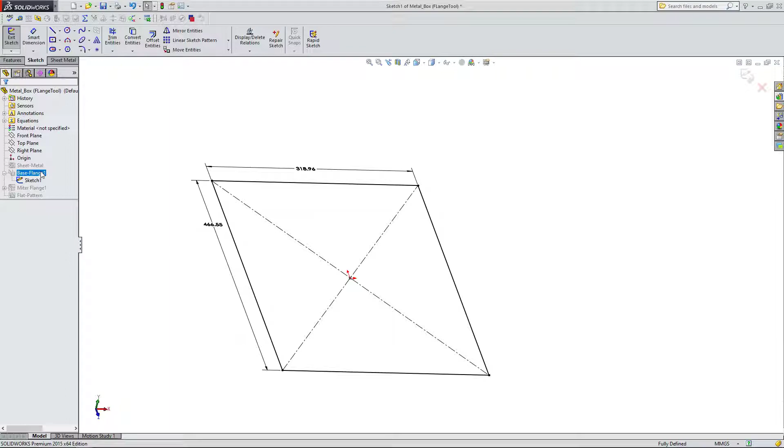Those edits include changing the sketch of the base flange. These are the dimensions I'm using. It doesn't have to be exact, it's really just a baseline measurement for the sizing.

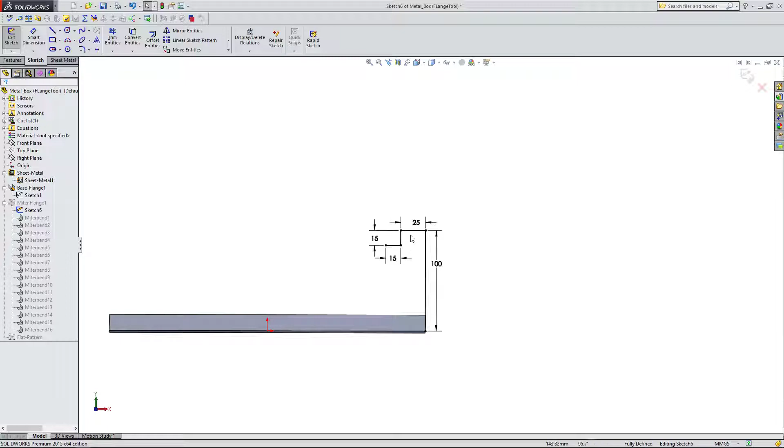The miter flange has also changed. If I go to the sketch of the miter flange, you'll see I've made it 100 high, 25 over, 15 and 15. And that sketch, as I mentioned in a previous video, is on this face.

Other additions I've made: if I go to the sheet metal parameters, I've changed my radius to be 1 millimeter and the thickness to be 2 millimeters. It's really just a theoretical dimension.

In real life, you have to go to your bend tables to get the correct estimates, but I just have this as a reference for now.

Just for this example, I set the radius to 1, and this is going to be 2 for the thickness. We're not going to be using a bend table in this example, so this gauge table is not going to be selected.

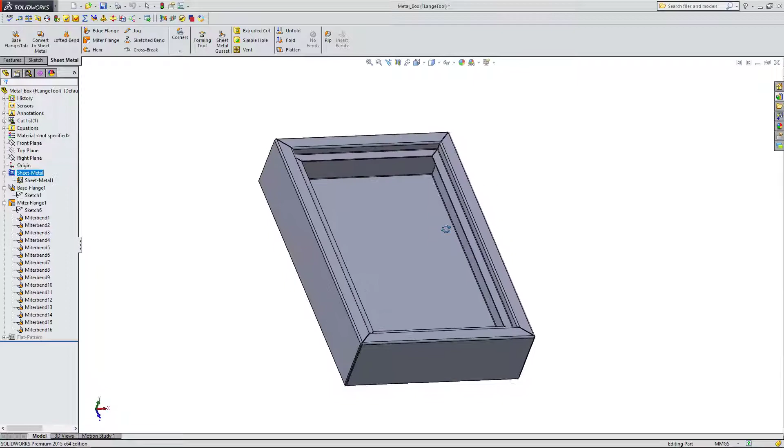From here, what we want to do in the creation of the box is create a hole or two for our exit cables, and also create a hole for the hinge.

To do that, I'm going to simply create a sketch. The miters themselves can't really be altered the way that an edge flange is altered.

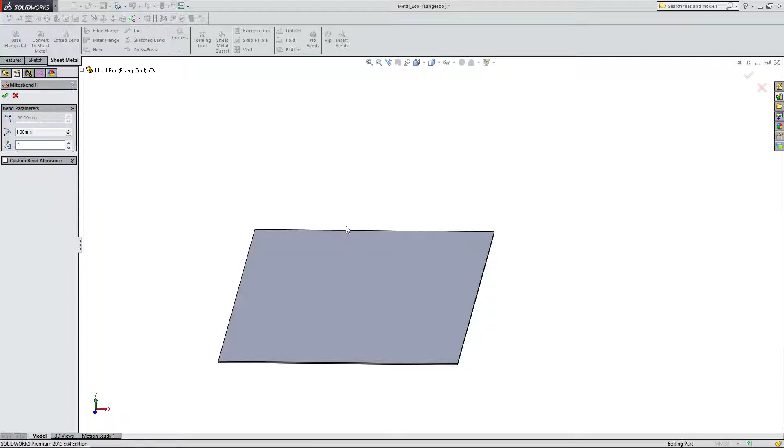So I'm just going to create a sketch on this face, and I'm going to create a few circles for the bottom.

I'm going to select the center point of the circle and the origin, and make them vertical with each other. I'm also going to make the 3 center points of the circles horizontal.

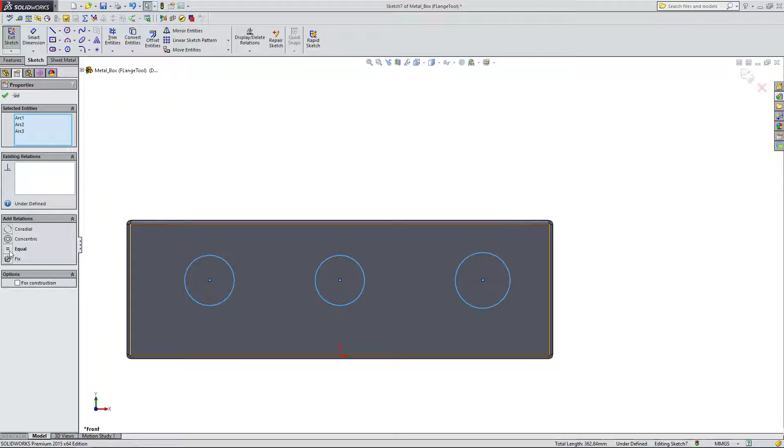I'm also going to select the 3 circles and make them all equal, which will make all the diameters the same.

So this is basically the result you should have, and you can see that the circles can slide, they all move together. I can set a dimension between these two, and I'll make it, let's say, 75.

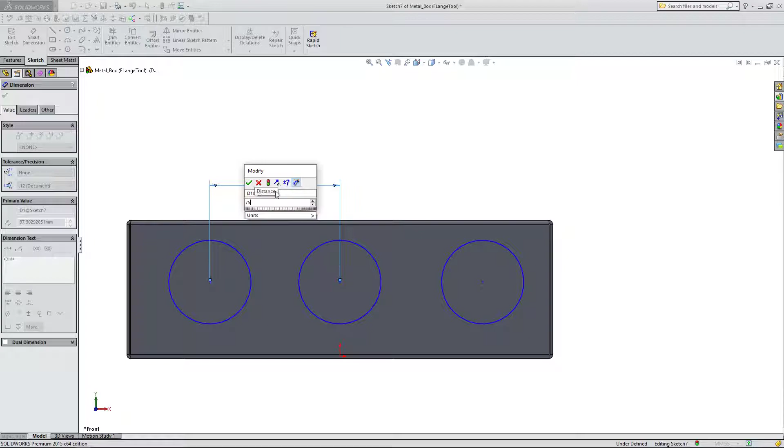I'm going to set the same dimension for these 2 circles between the center here and the ends, and I'll click here to make it 75 millimeters. And for the diameter, I'm going to set this to be, let's say, 40, right here, 40 millimeters.

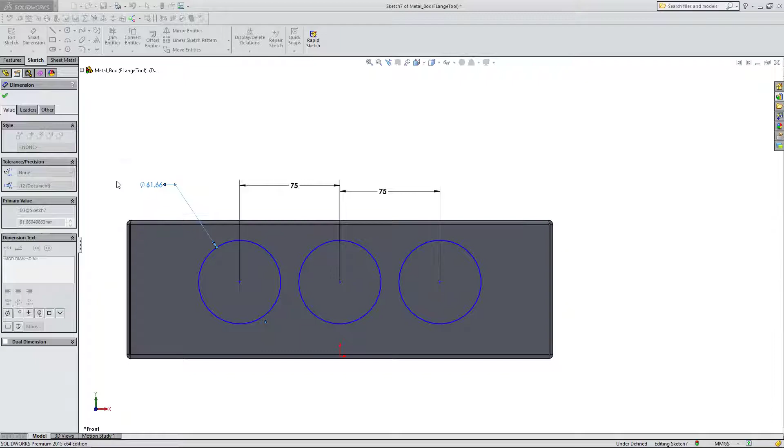From here, we're almost done. We just need to constrain it in this direction. So I'm going to set a dimension again from the origin, and that's going to be 40 millimeters.

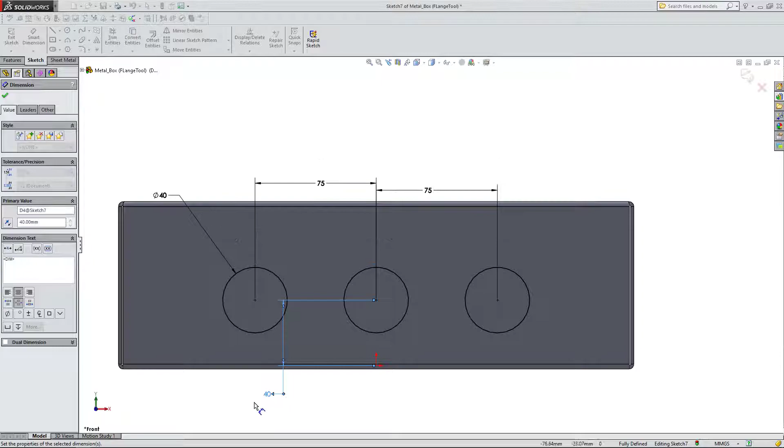If I'd like, instead of taking it from the origin, I could actually take it from the base of the part. So I can click on the bottom line, convert the entities, and create a smart dimension here. If any of this is new to you, I definitely recommend looking at a beginner's tutorial in Solidworks.

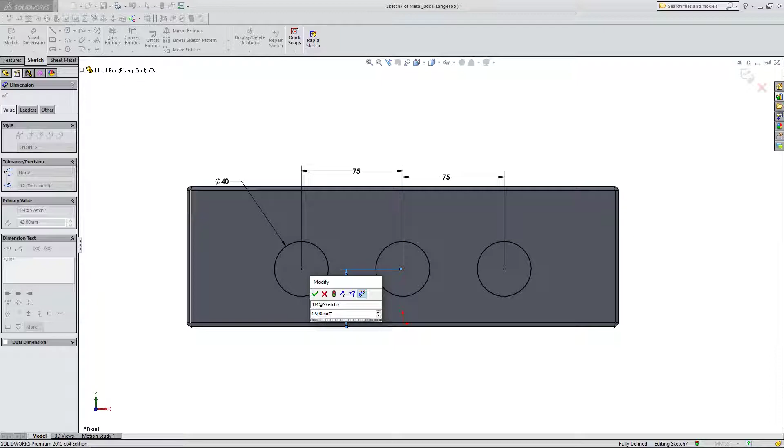I have some good Solidworks tutorial videos, or if you want to look at someone else's tutorials, just to understand basic sketching rules. If you want to check out my video, look at part 3 of the beginner training series, where we go over sketching.

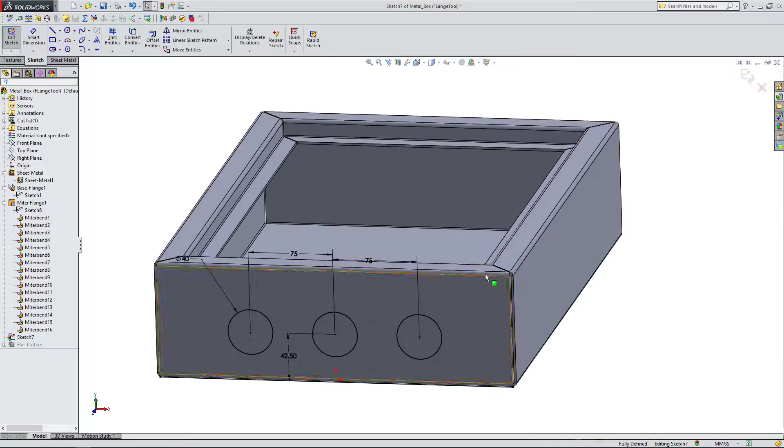So we're here with our 3 circles. I can go to my sheet metal tab and create a cut, an extruded cut here. So I'm going to click on extruded cut and select my 3 circles.

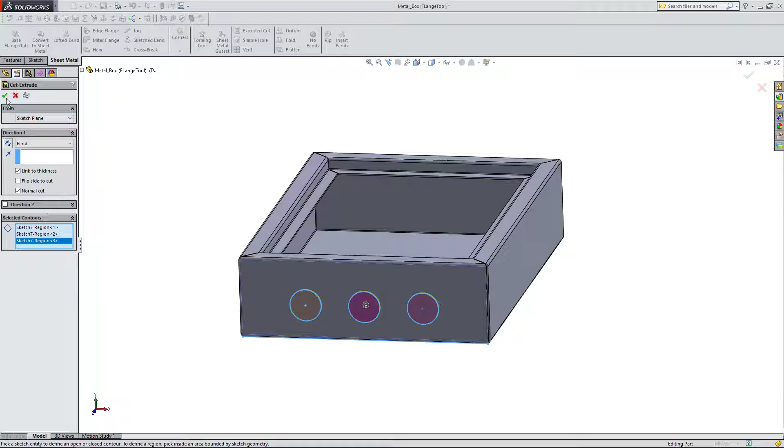I'm going to come up here and click on link to thickness, right here. When I click on link to thickness, it's going to automatically link the value of the thickness of the sheet metal to this cut. So I'm going to hit OK, and you'll see that the 3 holes have been created.

Now we want to create 2 more holes here for the hinge. So I'm just going to come up here and save this first. I'm going to start a sketch on the front plane.

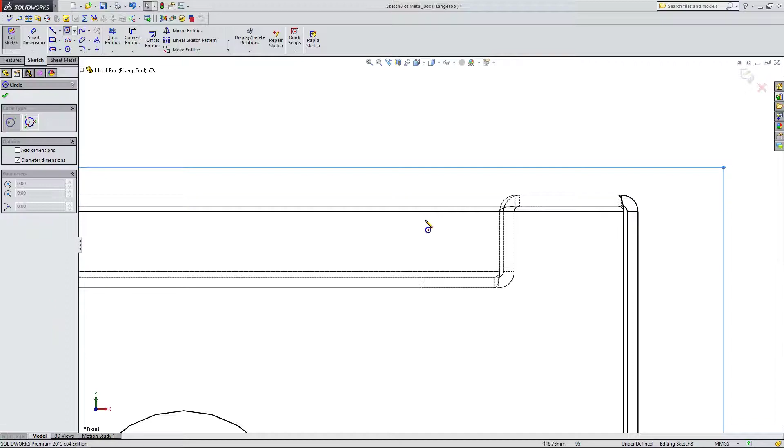I'm going to go to the top, display style, and make it wireframe so I can see through the part. Now I can create a circle and lay it about here. You can see that it's in line with this wall right here.

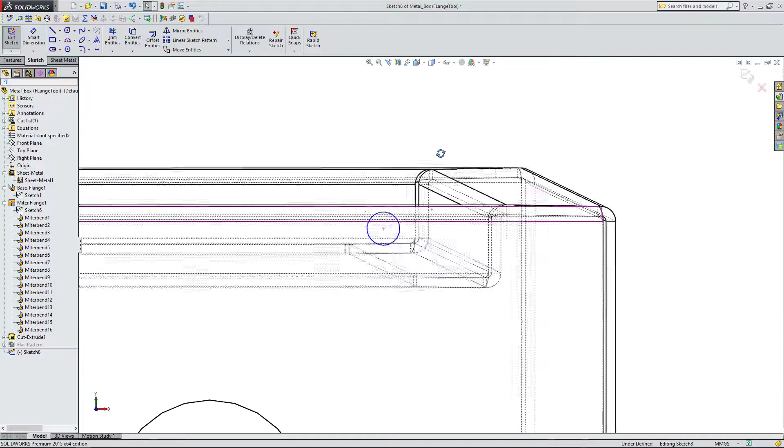And that's the wall where we want to create our circular cut. So I'm going to have to convert a couple of entities here. I'm going to convert this line and this line. I know it's a little hard to see from my screen, but you can see that these two lines were projected.

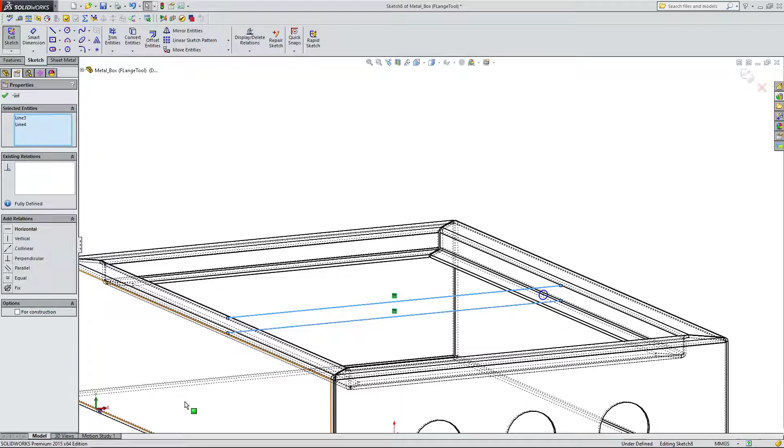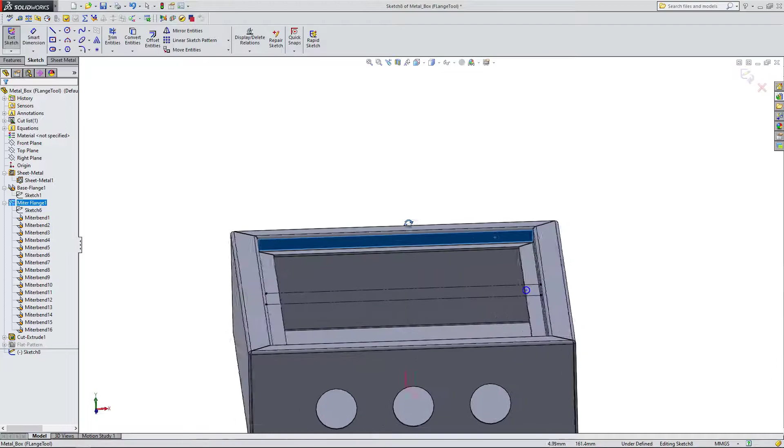I'm going to make them for construction. And if we look at it from here again, you can see that I've converted basically the wall. Let me show you in shaded with edges. I took this line and this line, and the reason I did that is because I want to show the area that I'm going to be cutting into.

So now that I have these two lines, I can create a dimension between them. I'll set a dimension here, drag it out, and hit OK. Now I could create a dimension from the center of the circle out. I'm going to click on this value and do divided by 2, or /2, and hit OK. You'll see that places my circle directly in the middle, between these two lines.

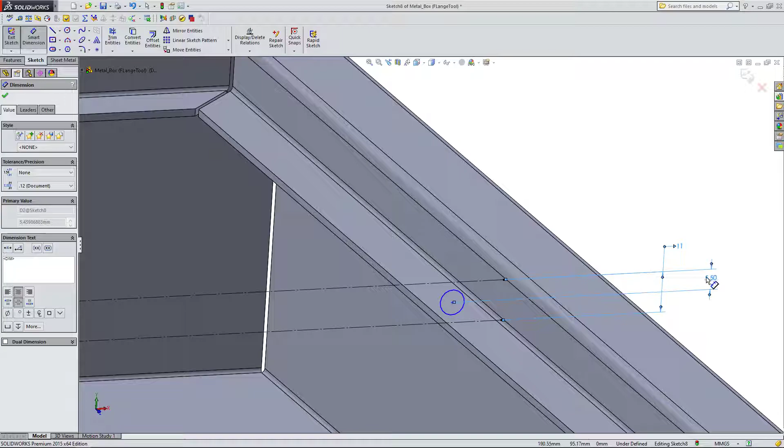So there are a lot of ways to do that step. This is the way I chose to do it. I know there are better ways — I could have drawn a line between them — but for now we're going to leave it at that.

From here, I'm going to create one more dimension between the end point of the line and the center of the circle. I'm going to set this to be, let's say, 15, and we'll see how it looks once the cut is done.

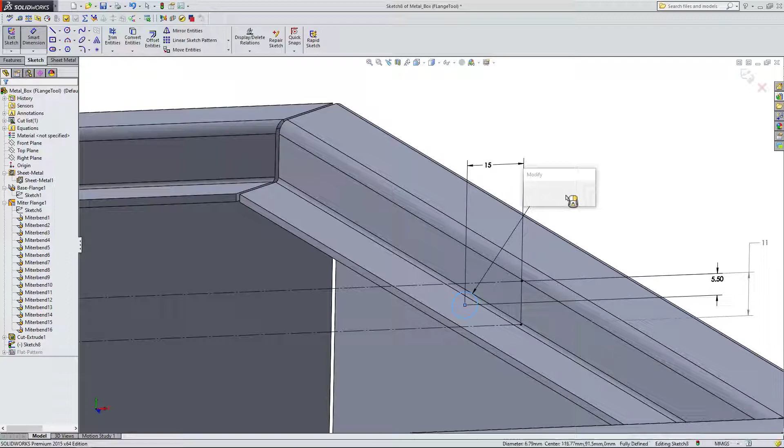And I'm going to set a dimension here for the diameter of the circle to be, let's say, 6 millimeters. We'll see what that looks like.

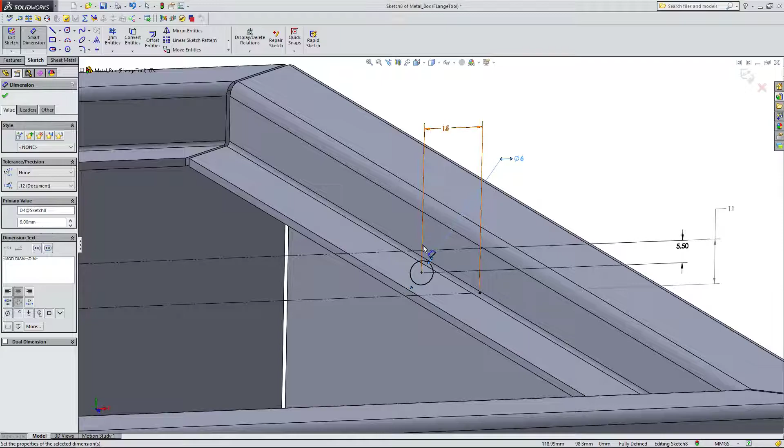So that's a good hole size, but I'm going to bump it up a little bit. I don't want it too large, where it's cutting into the wall, but I also don't want it too small, where the rod we're going to fit inside isn't sized largely enough. So you kind of have to sneak up on it. I'm just going to set it at 7.5 millimeters for this example.

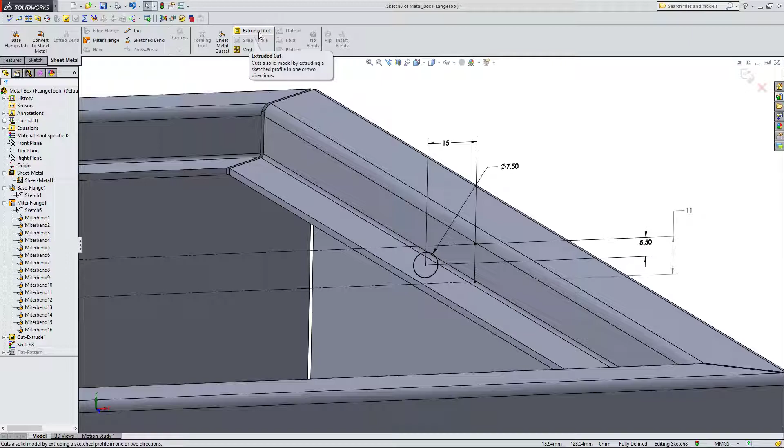And I'm going to create an extruded cut here underneath the sheet metal tab. I can come down under direction 1 and do through all both, and that's going to cut all the way through. Now I don't want to cut all the way through — I really just want to cut through this wall, and this wall.

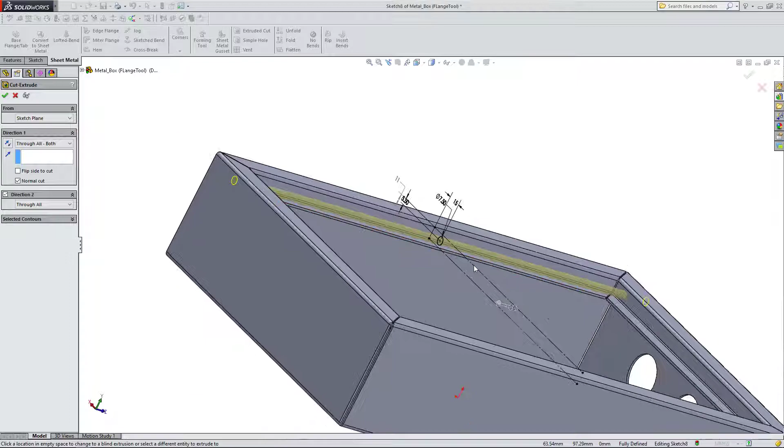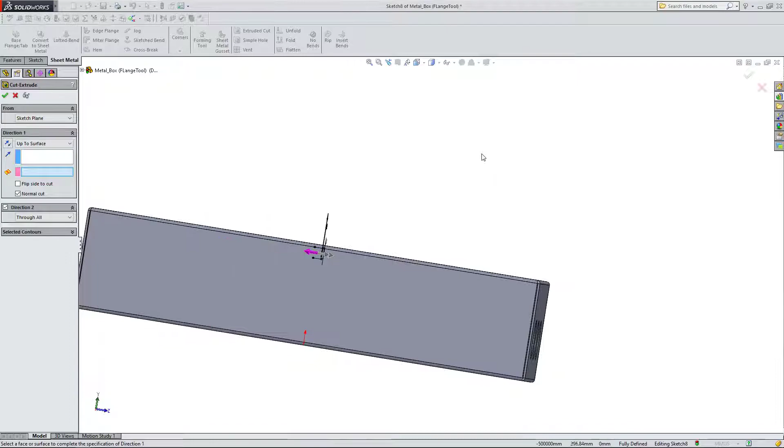So to do that, I can come back here and do a blind cut. And I can actually do up to surface. So if I choose up to surface, then I can select the back side of this face.

Now the tricky part is, you can't see it because it's hidden inside here. So I'm going to exit out of this first and cut the part in half so I can see it better. If you see what I just did, I came up here where it says section view. So click on section view.

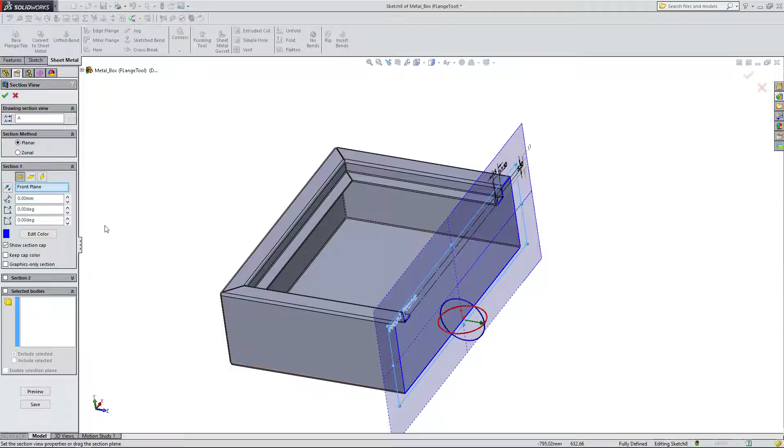By default, it's going to choose this front plane. You can come up here where it says section 1, and click on top plane or right plane. This right plane is what we want — we want to cut the part so we can look on the inside wall here. So that's okay, I'm going to hit OK.

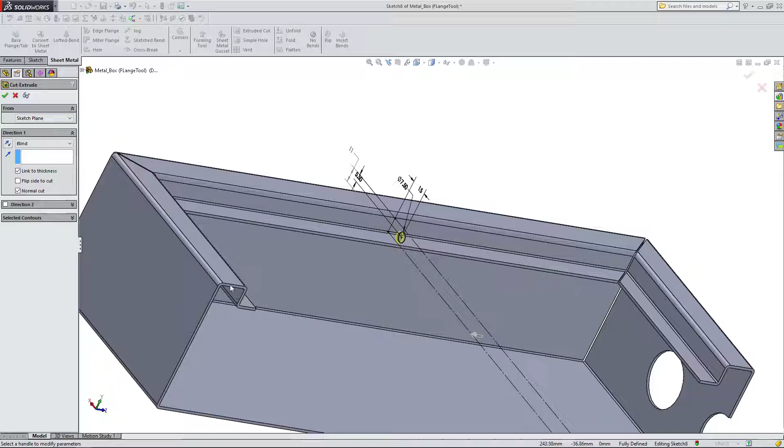Now I can go back to my cut extrude up here, and select this wall right here. I'm going to do up to surface, and click on the back wall — that's my direction 1. Then I click here on direction 2 and do the same thing: up to surface, and click on this surface. With these two things selected, I'm just going to hit OK.